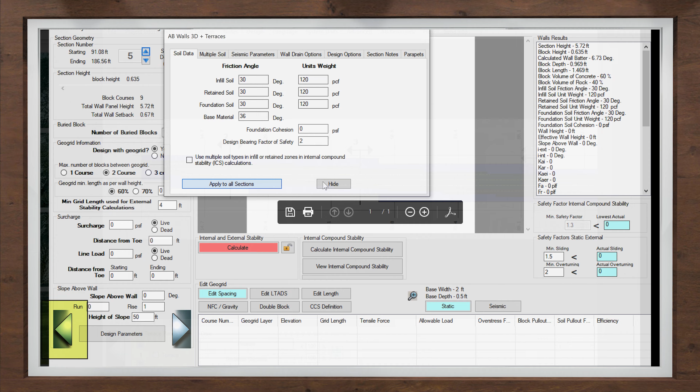Before we get started on the panel section design, I want to review that the panels are determined in the previous screen. We have a full video on how this is done, but your panel sections are defined based on the wall height, what is above the wall, and soil conditions. Remember, the panel section will represent the entire height of that panel, not just where the line is drawn on the elevation view.

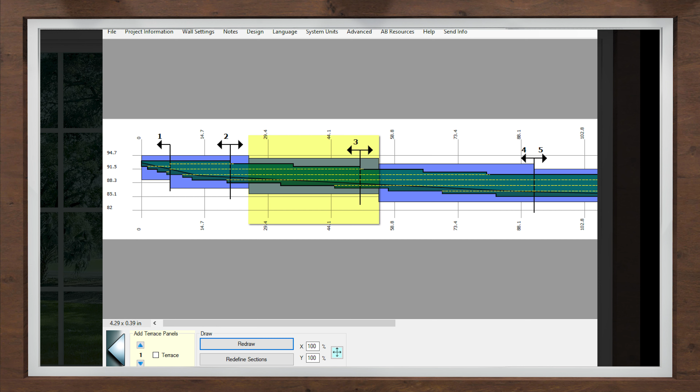When entering the section screen of the software, the first thing the designer will see is the soil information. These parameters should be set based on a geotechnical report or the on-site soils. The default parameters are 30 and 120 for the infill, retained, and foundation soil.

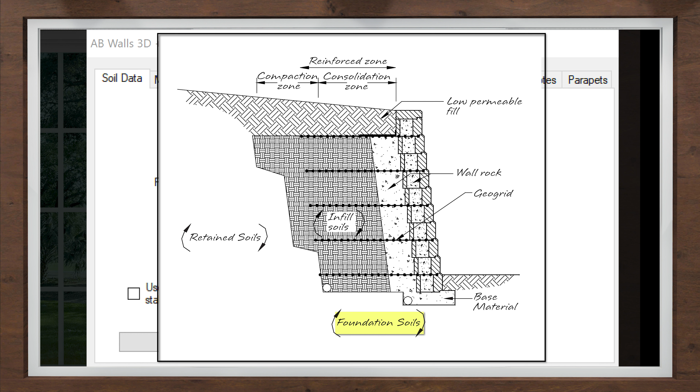The infill soil is the soil in the geogrid zone. The retained soil is the soil behind the infill zone, and the foundation soil is the soil below the retaining wall. The base material is the aggregate base below the blocks, so the 36-degree friction angle will typically not be changed.

The foundation cohesion is only referenced in the bearing capacity equations and is often left at 0 to be conservative. As for the bearing factor of safety, industry recommends a minimum of 2, hence the default value.

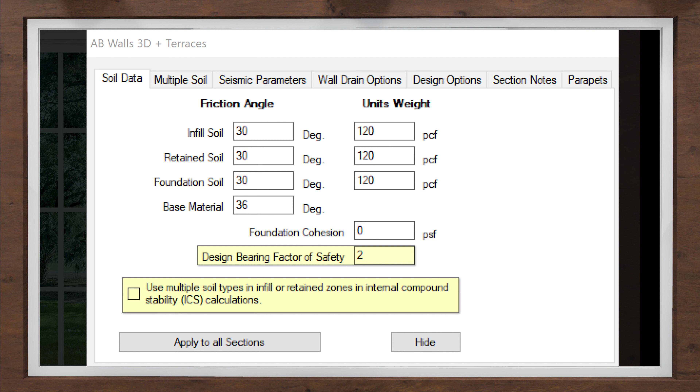At the bottom of this page, there is a checkbox for using multiple soils, which is covered in another video. Once the soils are set, the designer will click the Apply to All Sections button, then the Hide button, and all the soil information above will be used for all sections. If the default soils are not changed, a pop-up will appear to confirm they are the correct soils.

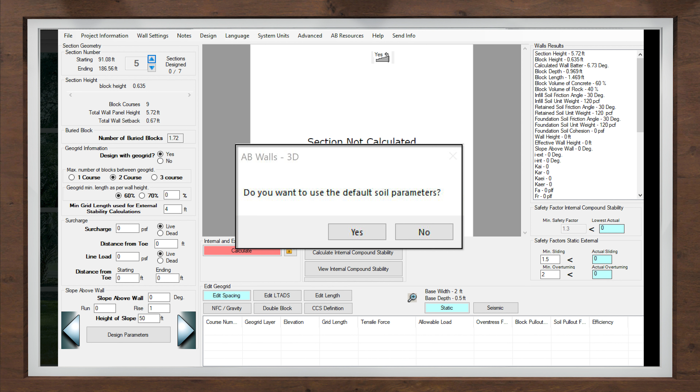After the soils are applied, the designer will set section geometry parameters. Starting in the top left corner, the software will select the tallest section of the wall to design first, and provide you with a starting and ending station of the section.

Below section number is section height information based on the elevation view previously entered. This provides a numerical representation of the panel section in courses of block, panel height, and setback, so the designer can decide how to best design the section.

After reviewing the geometry entered, the designer is then faced with deciding if they want to use geogrid reinforcement in the design for added stability.

AB Walls is defaulted to industry best practice recommendations that geogrid be used in the designs when possible. It also recommends that the geogrid be spaced a max of 2 courses and its length be a minimum of 60% of the wall height or 4 feet, whichever is greater of the two.

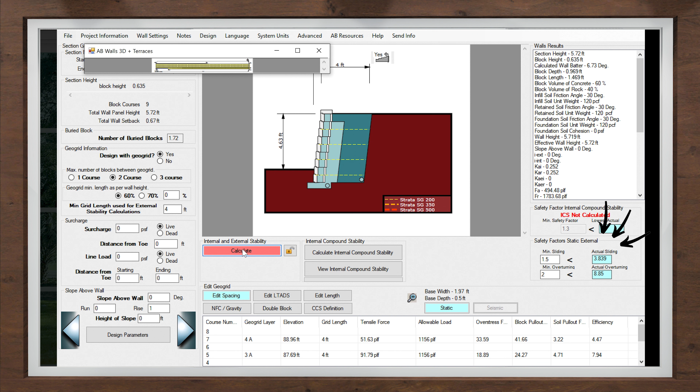Once the geogrid is set, the designer will click the Calculate button to determine the external safety factors for sliding and overturning on the right, comparing them to industry standards as the default value, and internal stability safety factors in the spreadsheet below. The values in the spreadsheet below are the internal calculations on each of the grid layers for overstress, pull out of block or connection, and pull out of soil.

These internal values are all recalculated as soon as a change is made in the sheet below. Watch the grid modification video to learn more about this feature. To see all layers of grid at once, you can use the magnifying glass to expand and minimize the spreadsheet.

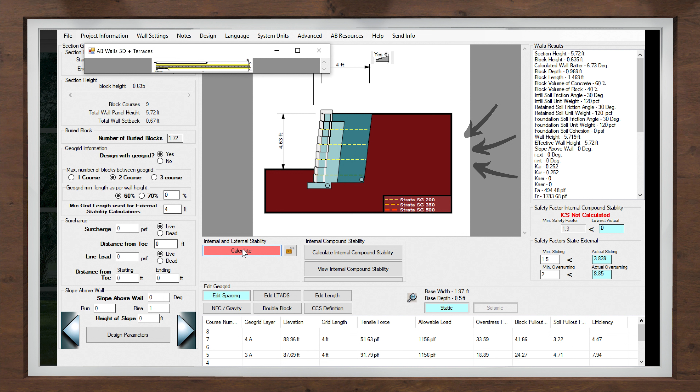The designer will also notice the panel section detail that appears in the middle of the screen, as well as an additional pop-up on the left-hand side. That pop-up shows the top of the wall, bottom of the wall, and stationing along the panel as a reference piece. To turn this pop-up off, the designer can click the Yes/No button in the top right corner of the section.

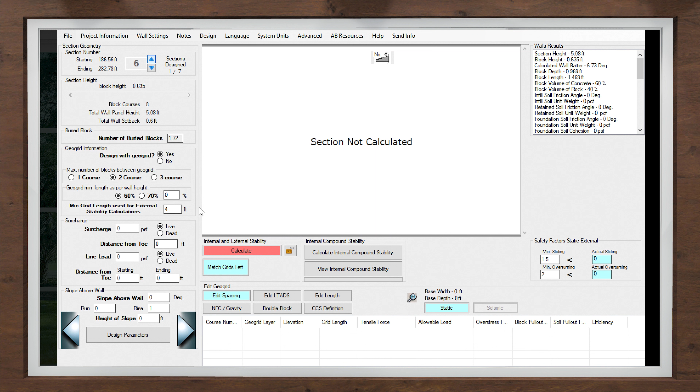For subsequent panel sections, the use of the Match Grids left and right buttons replace the Calculate button to ensure the geogrids will remain on the same elevation throughout the wall design.

The panel section screen is where you run the calculations to determine the stability of your wall designs, while providing the designer with a panel section visual to better understand what the design entails and its feasibility. This is why the panel section screen is the most important page of AB Walls.